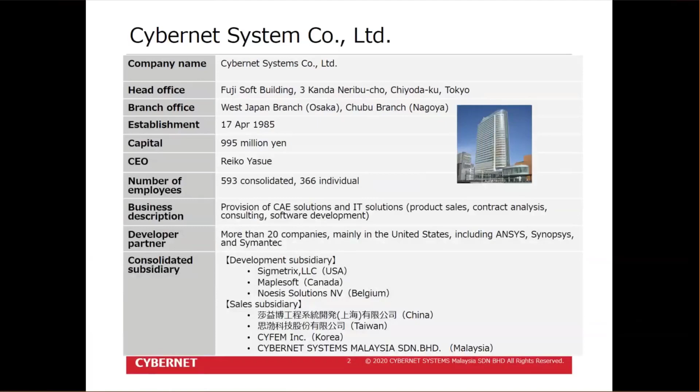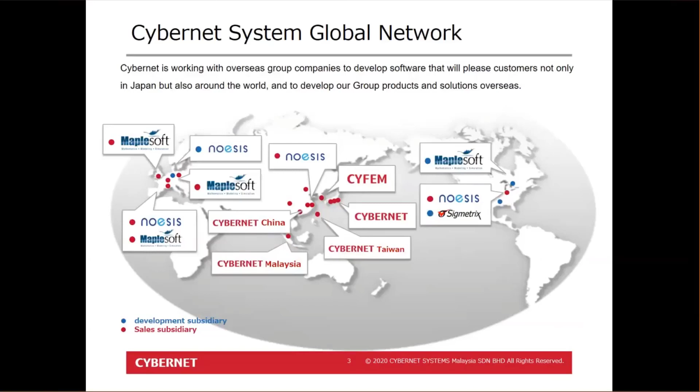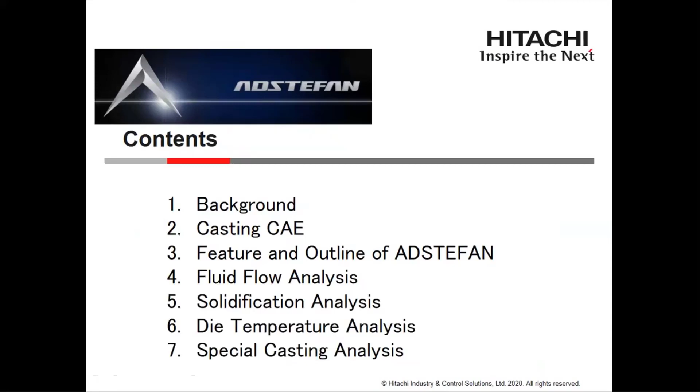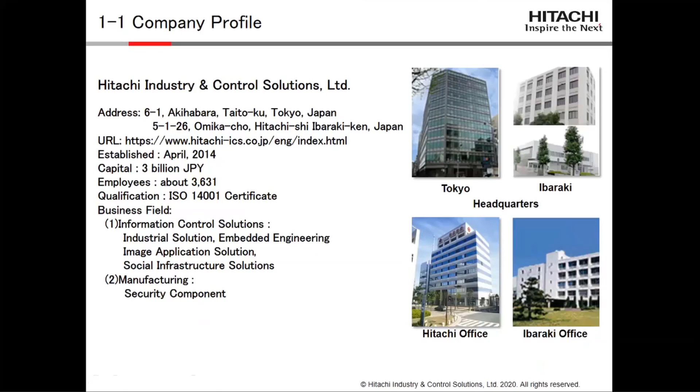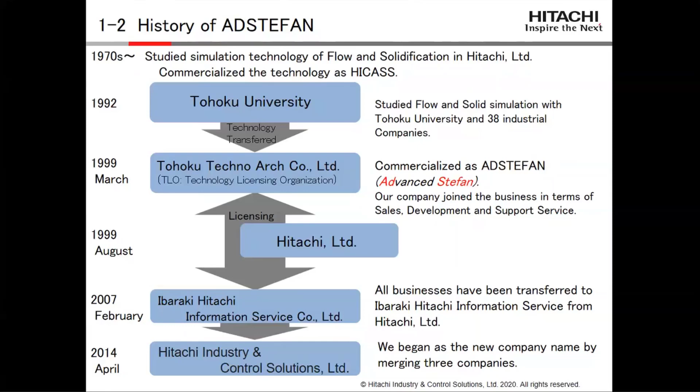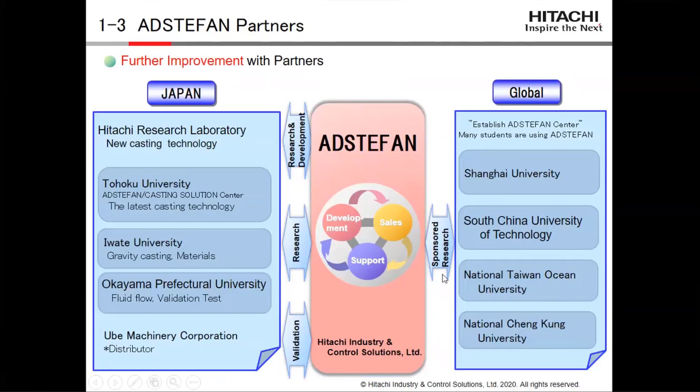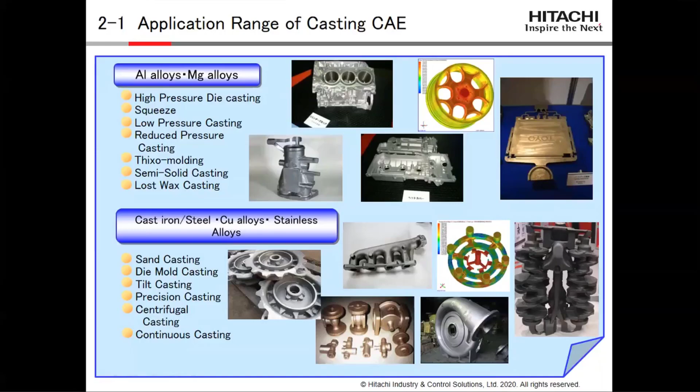Secondly, it's about overview of casting CAE, specifically the application range. ADSTEFAN can be applied to aluminum, magnesium, steel, copper, or stainless, and so on. As for casting method, high pressure die casting, squeeze casting, low pressure, and gravity casting, and so on. So we can deal with various casting methods.

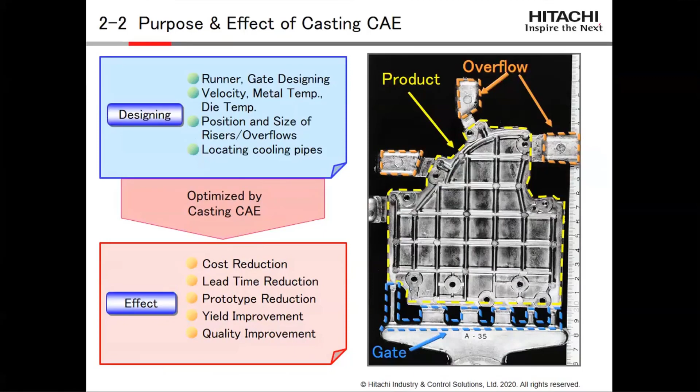Next is about the features and outline of ADSTEFAN. This slide shows ADSTEFAN's 3 key advantages. Firstly, high-speed analysis. Second, easy operation. And last, solid foundation. ADSTEFAN enables contribution to manufacturing products in factories.

ADSTEFAN is a casting CAE system, and engineers can get an optimal solution by trial and error in limited time by using the simulation software. Regarding high-speed analysis, we are adopting multiprocessor technology, and by adopting this technology, high-speed analysis can be realized.

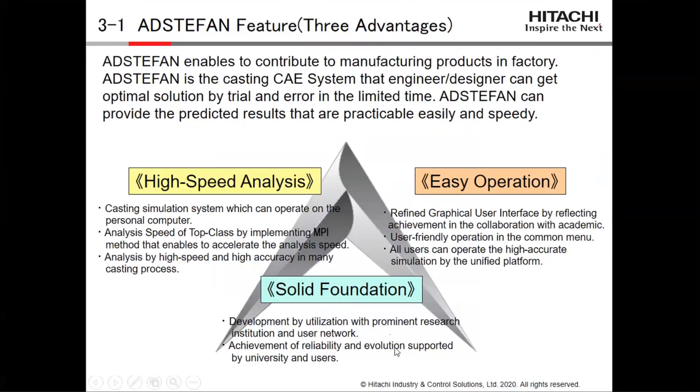Second is easy operation. We are adapting user-friendly operation in the common menu by taking feedback from many users. Last, solid foundation, which is about development by utilization with prominent research institutions and user networks. By adopting many excellent institutions, ADSTEFAN gains reliability through many universities and users.

Next is about the ADSTEFAN system configuration. The system consists of preprocessor, solver, and post-processor. In the preprocessor, it's about importing the original model and setting analysis conditions. Second, the solver consists of fluid flow, solidification, and other optional modules, and so on. Last, the post-processor is for viewing analysis results executed in ADSTEFAN software.

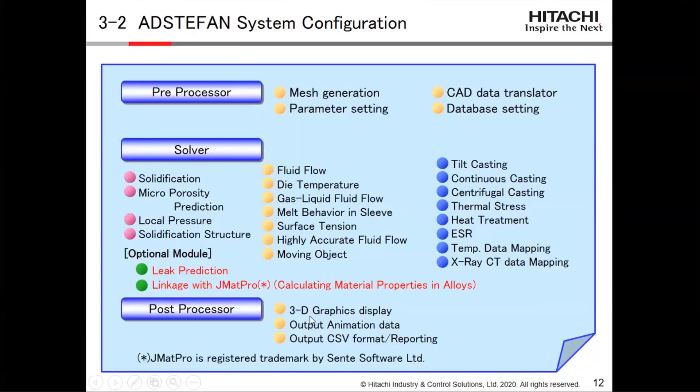This slide shows ADSTEFAN's parallel computing and floating version. By utilizing multiprocessors from 1 to 2, 4, 8, and so on, we can realize higher speed than a single core. The right side shows that ADSTEFAN is also available as a floating version.

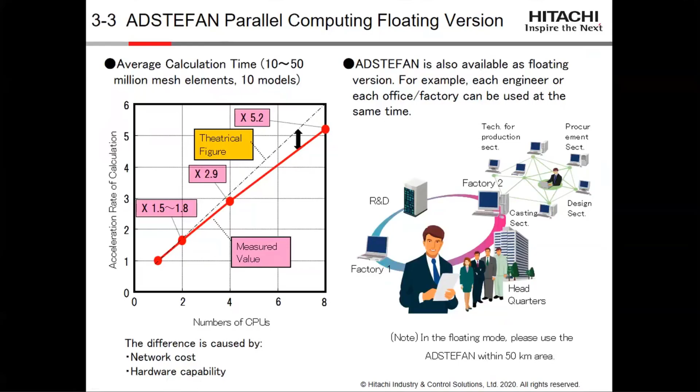By using this even in remote areas, you can access the server system. ADSTEFAN can be used in remote areas.

This shows the distribution of the ADSTEFAN map. In Japan, about 500 users are using it. India has about 53, China has 50 licenses, and so on. In the next generation, Malaysia will also have many users in the future.

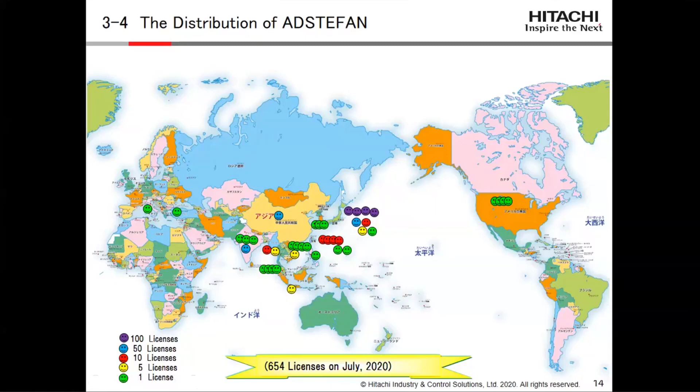Next, about fluid flow analysis. This shows many defects which can be evaluated by ADSTEFAN. It shows the casting defect called misrun. The filling situation is not so good in this area, so molten metal is not fully filled. The simulation result shows the misrun defect area, where temperature is low, showing an unfilled area due to low temperature below the solidification temperature.

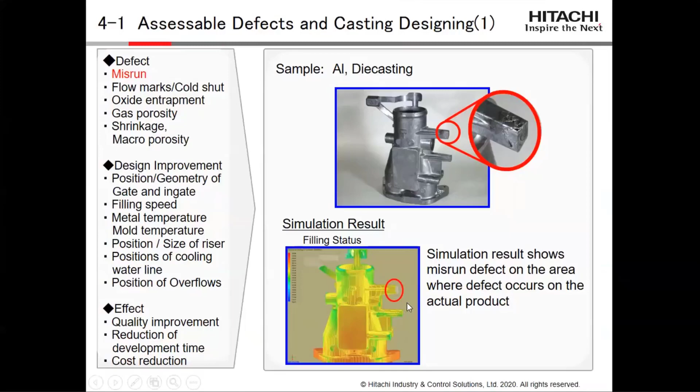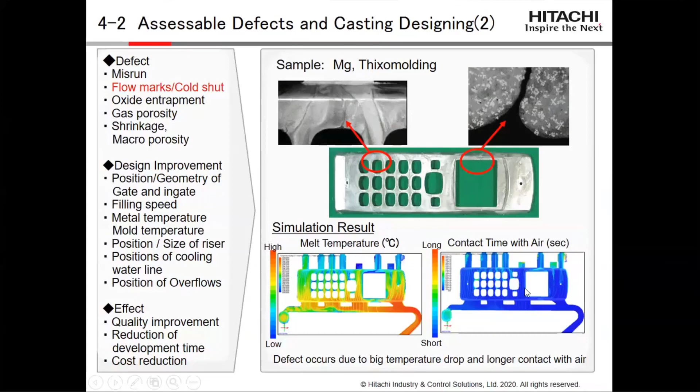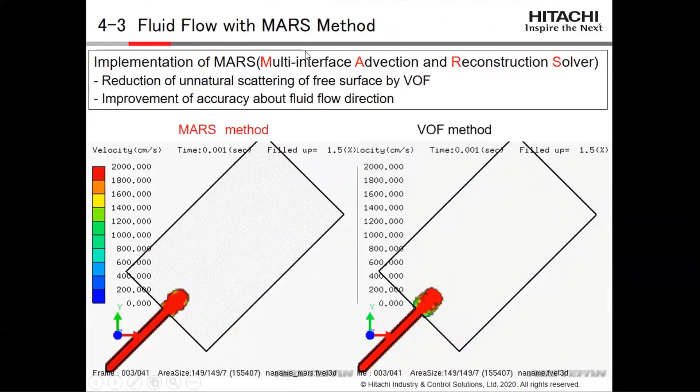Next it shows fluid flow with the MARS method. ADSTEFAN adapted the technology of the MARS method, covering the drawback of the finite FDM method, which is represented by both methods. In ADSTEFAN, we are focused on the MARS method.

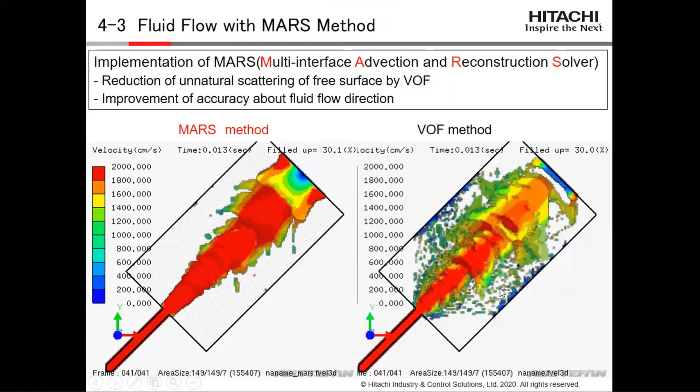It is about this technology: the flow trajectory is revised by adapting the MARS method. On the contrary, in the conventional method, it shows an unnatural molten metal trajectory, which is revised here.

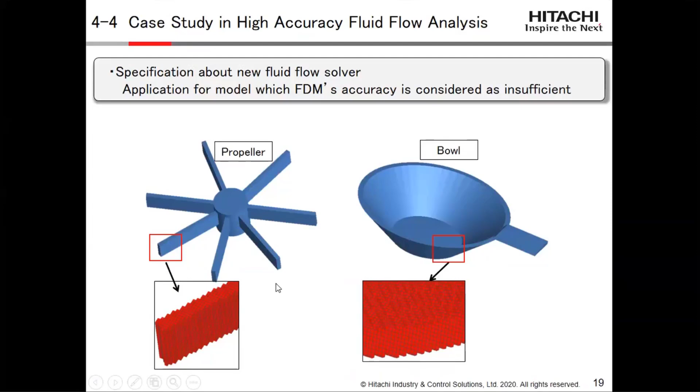Next is the case study of high accuracy fluid flow analysis. One example is about a propeller, and the second is a bowl shape. This shows the case study comparing the conventional method, blended element, and high accuracy fluid flow, which was adopted about 3 years ago. It shows the demonstration.

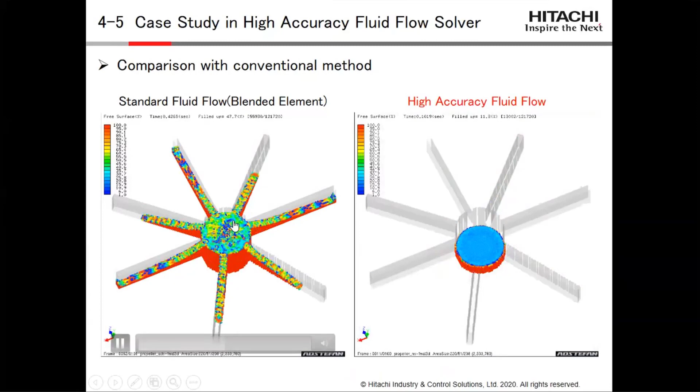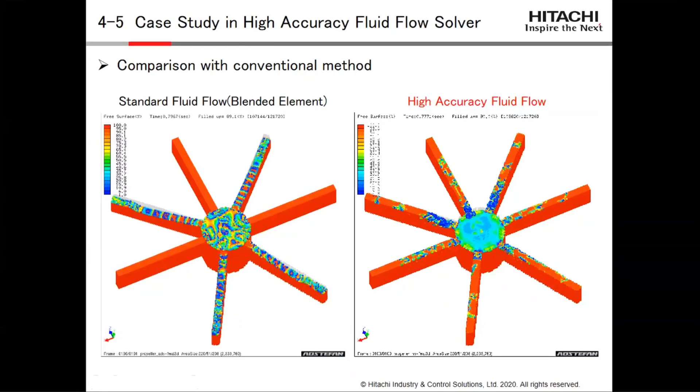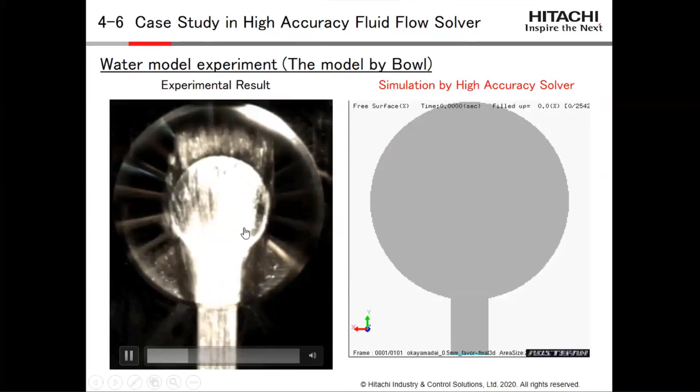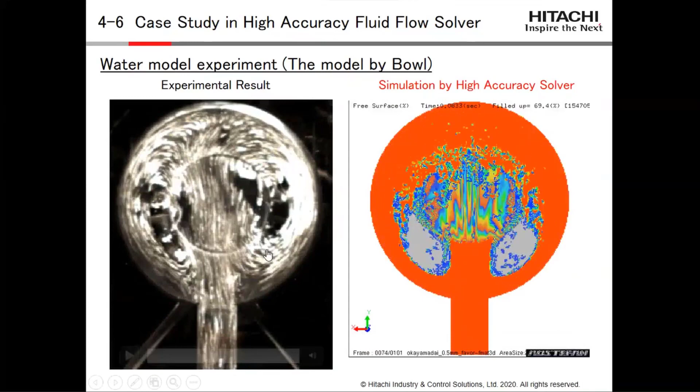We are also showing another case study about the model with a bowl shape. This is the result from a water model experiment, which is the actual case. On the contrary, this is the result of the simulation, and the simulation result matches the experiment result.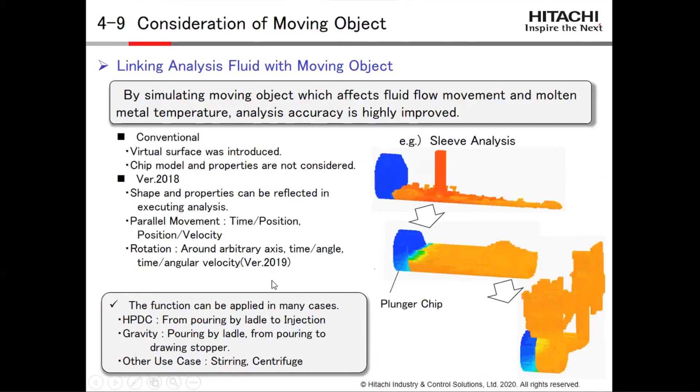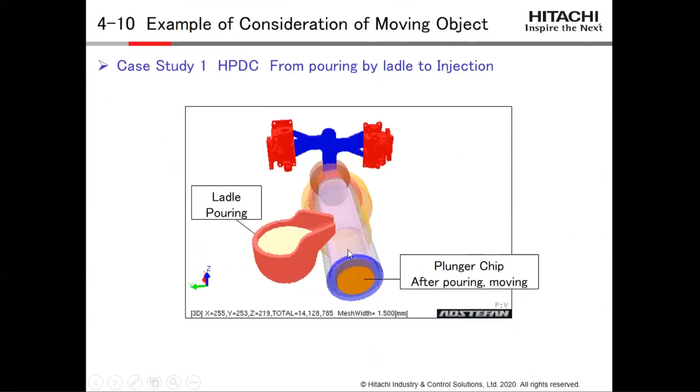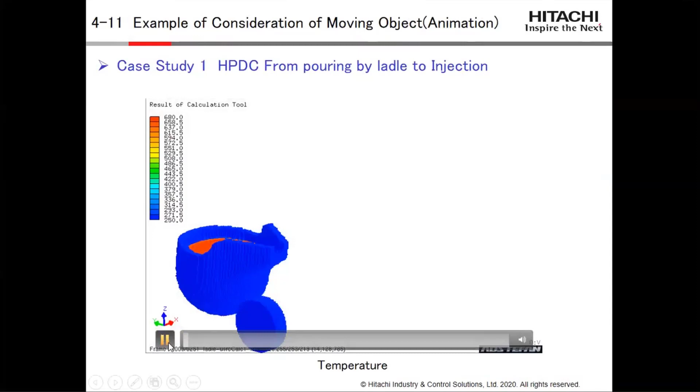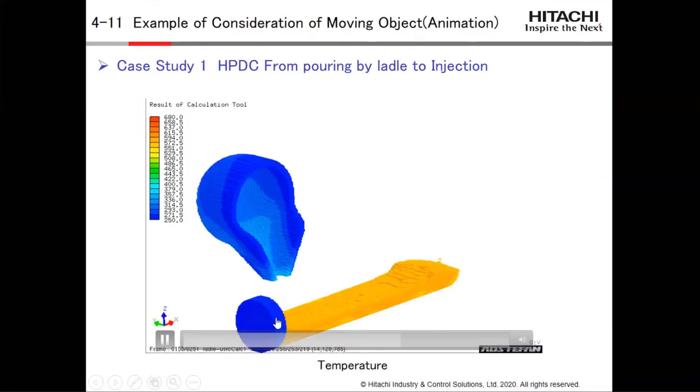Next, this shows the case study considering moving objects. Firstly, in high pressure die casting, from pouring by ladle to injection from the top of the sleeve, ladle pouring is executed in the sleeve area. After pouring, the plunger chip is also moving from the left side to the right side. This shows the situation of the moving object function during pouring and after pouring as the plunger chip moves.

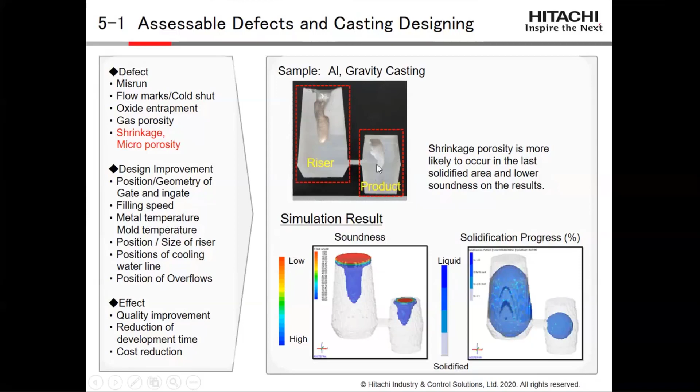In this case, the gate size is very narrow and relatively long, so in this gate design, the design is not so good.

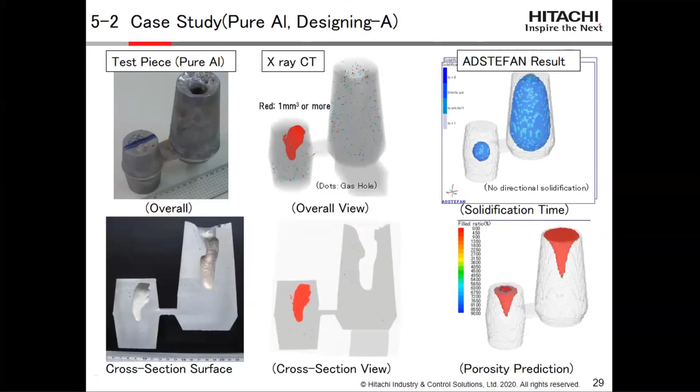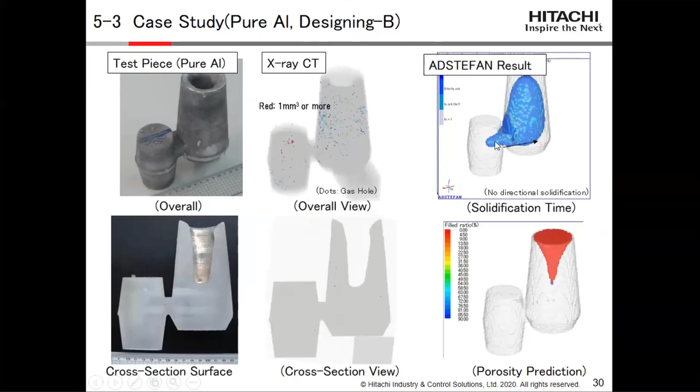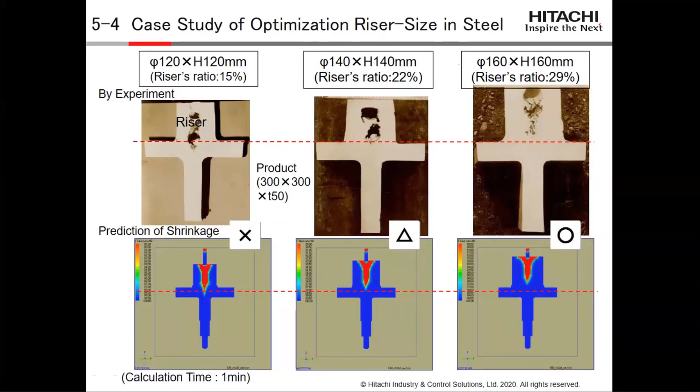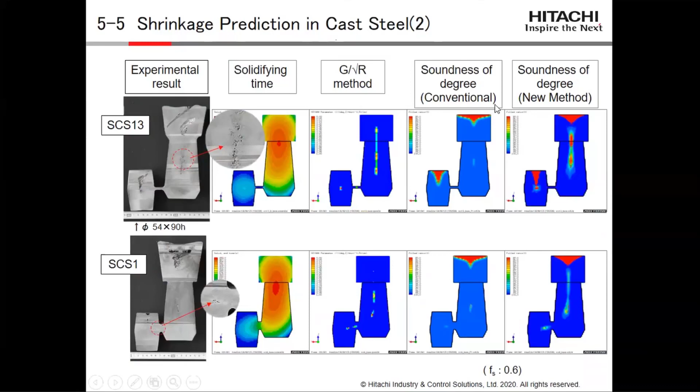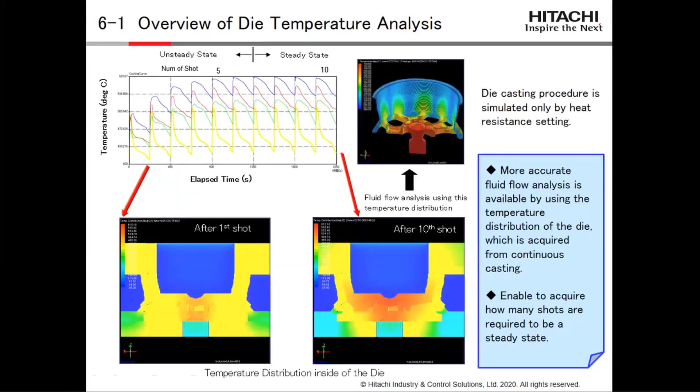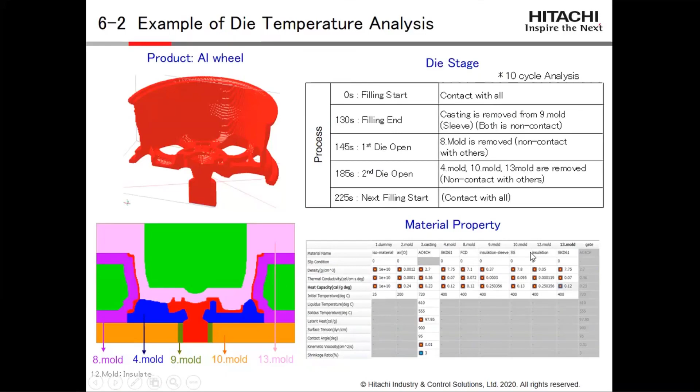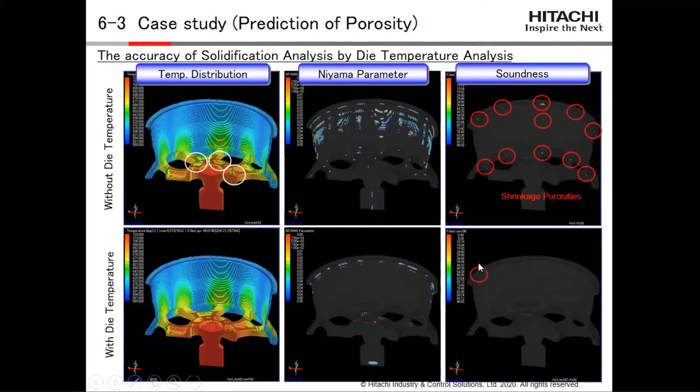Without reflecting the temperature, shrinkage was happening in many areas. On the contrary, with reflecting the die temperature, no shrinkage happened.

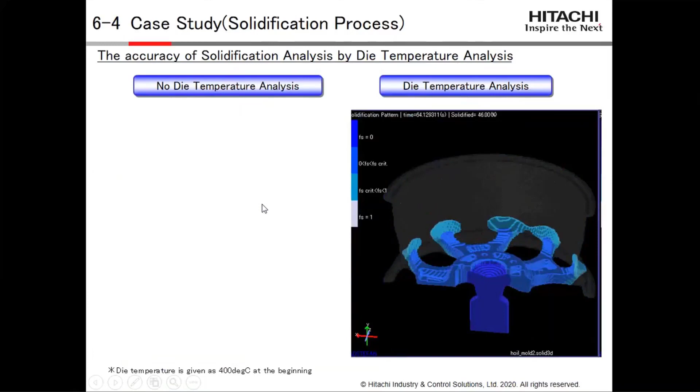This shows a demonstration of temperature. The blue area is the unsolidified area, and it shows where solidification has finished, while some area still remains unsolidified.

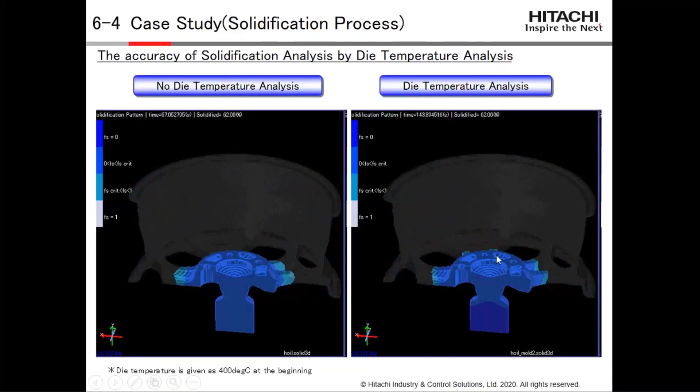On the right side, directional solidification was realized, as shown by the image separating this area from that area. When the area is solidifying, the shrinking area is still remained.

On the contrary, in this case the shrink area is shifting from the product to the gate area. So the shrink area moves from top to gate, and in this case no shrink area remains in the product area.

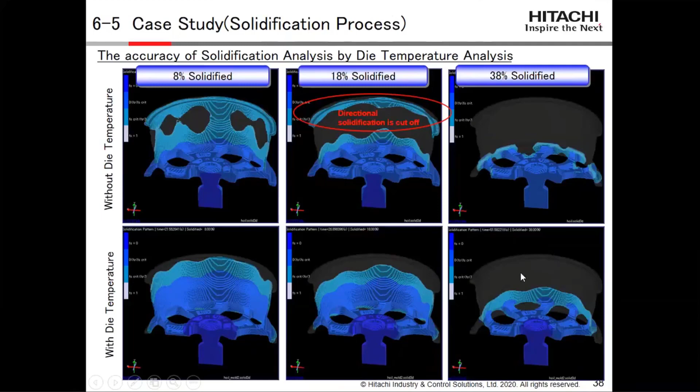By reflecting the result of the fluid flow, we can evaluate the solidification analysis.

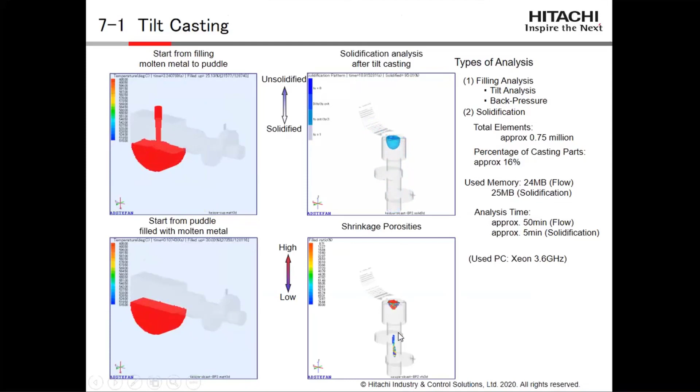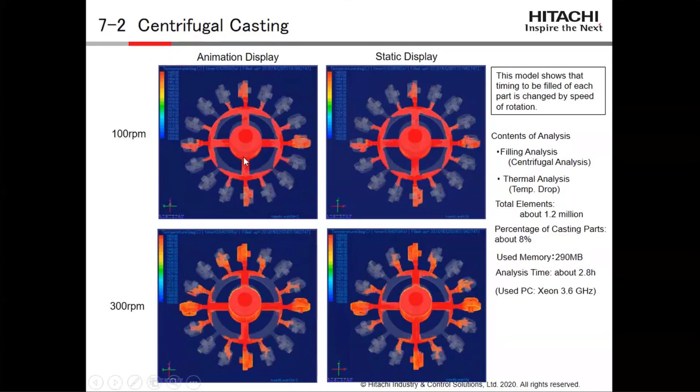This shows centrifugal casting, showing the difference between rotation speeds of 100 RPM and 300 RPM, and the fluid flow trajectory as follows. We can show results with rotating and without rotating style in ADSTEFAN.

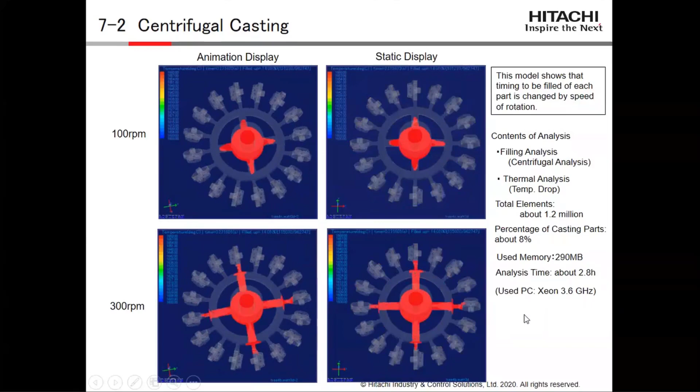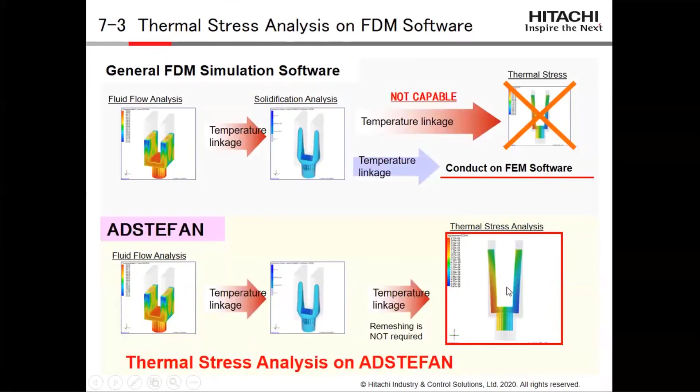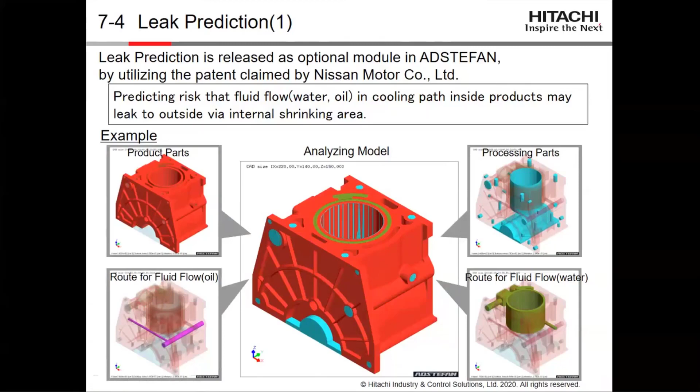It shows the degree of risk of leaking water, oil, and so on, by measuring the distance between the oil path and the shrink area. The shorter the leak path, the bigger the risk.

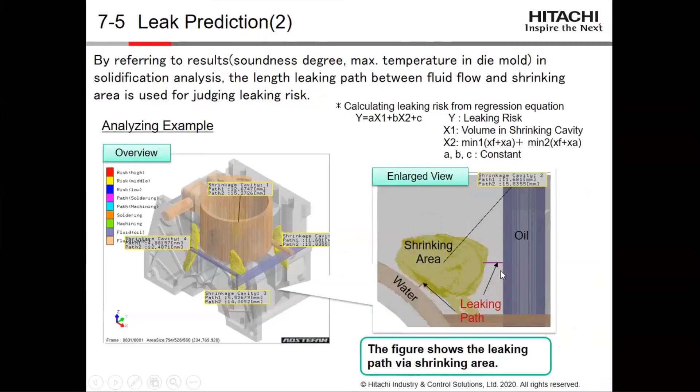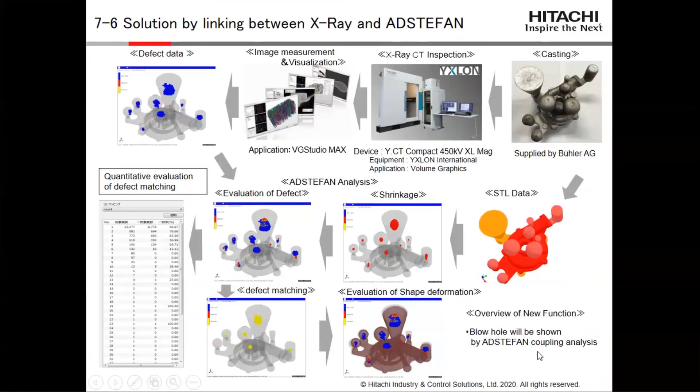So this is the end of the introduction of the casting simulation system ADSTEFAN. Thank you for hearing our presentation.